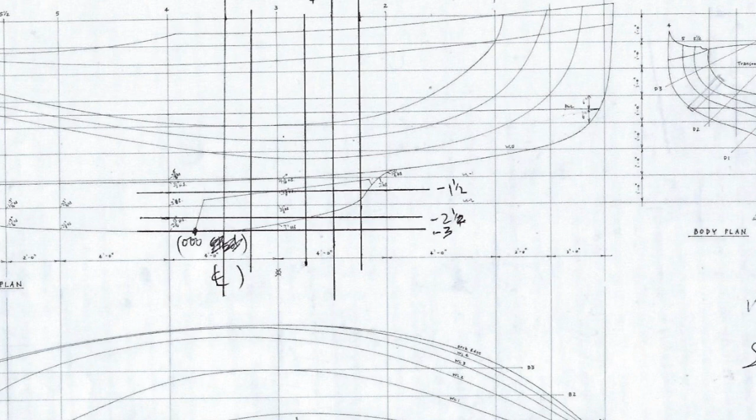My colleague Simon Sadubin and I measured up the original boat and lofted it out from our measurements back in about 2003. Then Simon drew up the lines plan from our lofting, but we didn't do a detailed lofting of the ballast keel at that time. Lofting is drawing the plans full size so that you can make patterns of parts of the boat, chiefly the station mould shapes around which you will bend the planking.

Back in 2003 it never occurred to me to film this lofting, so I won't be able to explain it using this boat as an example, but in my YouTube series on traditional clinker planking, the first 2 episodes are about lofting, which will give you the concept, even though the subject was a small dinghy.

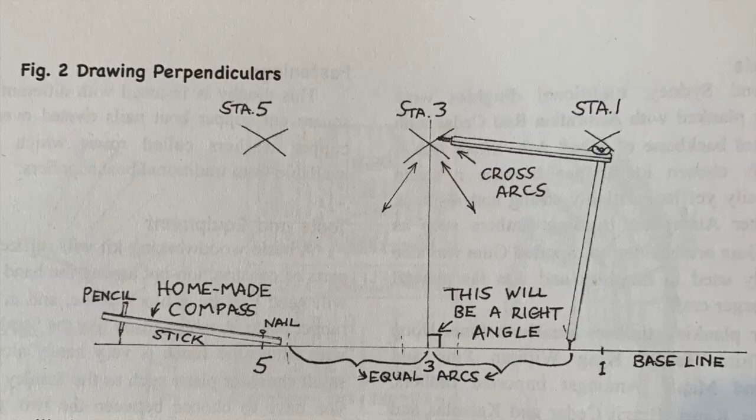Our original lofting didn't have enough detail of the ballast keel. What there was spread out over a couple of large sheets of chipboard, and with less room these days, it was easier to draw out a new grid and add the info from our tracings. It all fitted on one sheet. A lofting grid needs to be accurate. I laid out a straight baseline and all the parallel water lines, then drew in a vertical line that was exactly at right angles by this method.

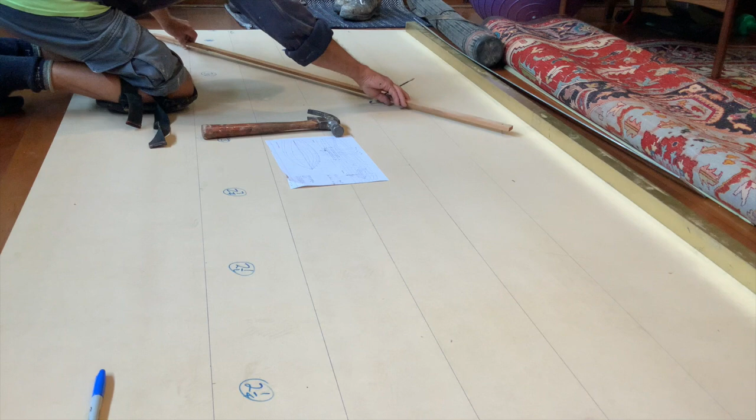Make equidistant marks out from your starting point with a basic compass. Then, extending the compass, mark 2 intersecting arcs from these points. A line from here to your starting point will be exactly 90 degrees to the baseline. The rest of the grid can be filled in by accurate measurement.

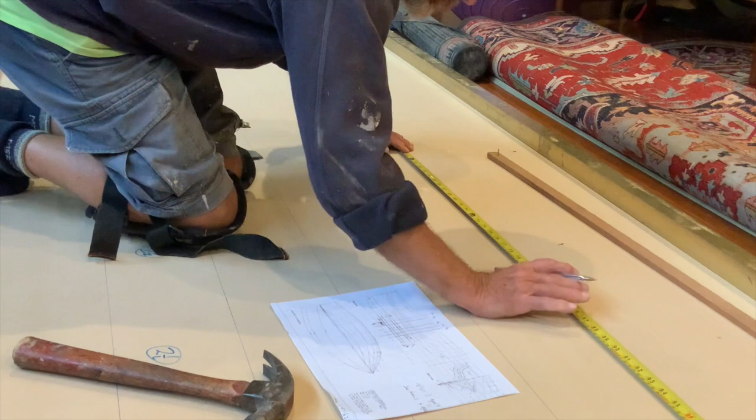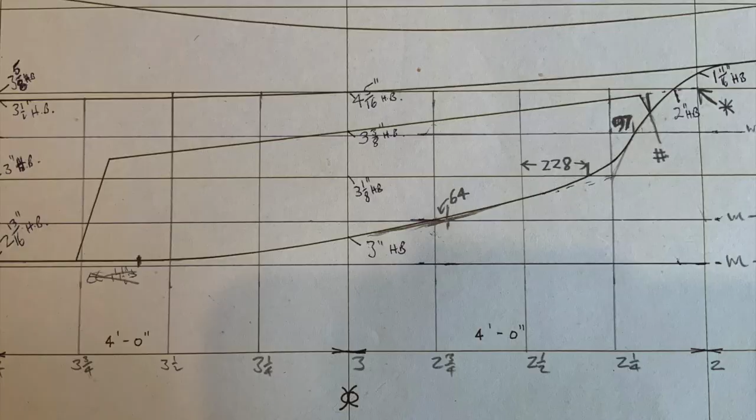Only station 3 goes through the ballast keel on the original lofting, so I added in more vertical stations, stations 2 1/4 to 3 3/4, and more horizontal waterlines for more detail. I got our original mylar tracings, and by pricking through with a nail, I transferred the details of the sections at the original station positions for stations 2, 3 and 4, spanning the area of the ballast keel, until I'd copied all of the details on our original lofting.

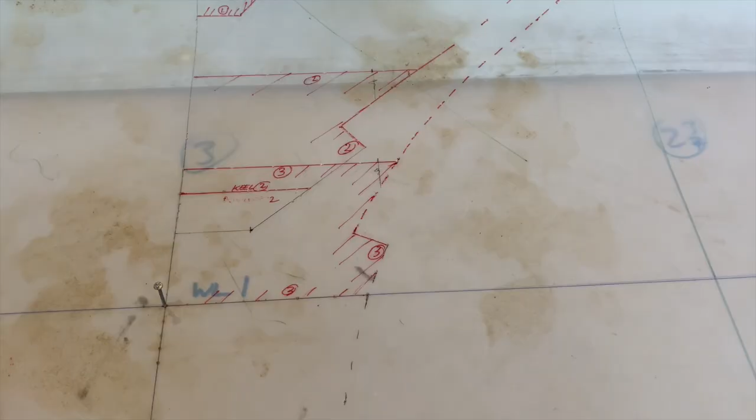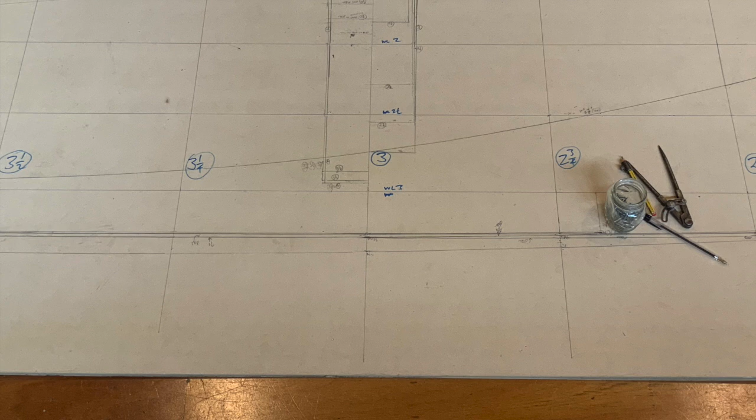So I had the shape of the wooden keel down through the deadwood and the lead keel to the bottom of the profile, and the width of the bottom of the profile all the way along. I plotted out the measurements from these sections to a longitudinal plan view on the baseline, and connected these points with a penciled line on a fair batten. This enabled me to pick up the measurements known as offsets at the new stations. Using these offsets, I plotted out the new intermediate stations.

Now, this is not meant to be a thorough how-to video, so don't worry if you can't get your head around it at this point. Even after lofting 3 or 4 boats, I still needed a textbook handy for the next one, and after that, even occasionally, I still needed to refer to one, especially if I hadn't lofted a boat for a while.

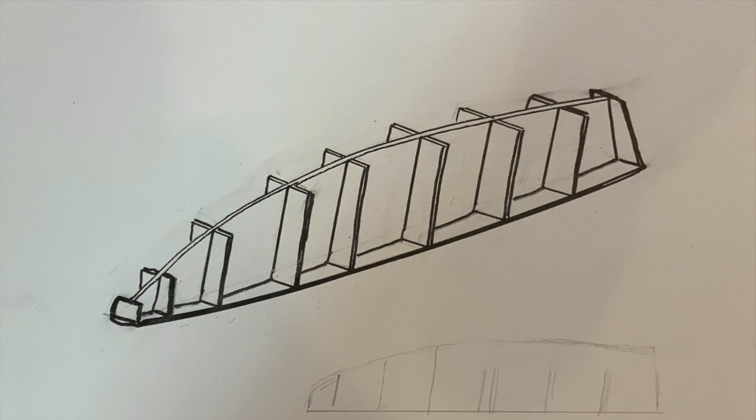Having drawn all the sections at the new stations, I transferred the shapes, with a deduction for the thickness of the cladding, onto plywood offcuts and set them up, upside down, on another piece of plywood representing the top of the keel, which was shaped by plotting out the half-breadths from a centre line spaced out along the slope of the top of the ballast keel, and therefore they needed to stand up at an angle.

The lower parts of the keel are straight in section, so I clad the stations in plywood, but used narrow strips of Western red cedar to strip plank the curved upper sections. This is like building a miniature boat. The bottom of the ballast keel was also done in plywood, and after fitting that, I rounded off the corners. Then I faired it all.

I used West System epoxy thickened with microspheres and used the bead bog method, which speeds up the process a little. When you sand off the top of the beads, you reach a fair surface quicker than if you'd covered the whole area. And then you fill in between the beads and sand again. Several coats of primer gave a smooth surface. Then the foundry applied their own silver paint.

I cast several keels in the late 1980s and early 1990s and had no accidents, but several near misses and a few minor problems. So for the 3 keels I've done since 2000, I've had them done at Central Foundry, who do a superb job. Mine was delivered recently, and now patiently waits in the cradle I made for it, which enables me to move it about. The original Ranger's ballast keel was 1180 kilos. This one came in at 1163. There'll be a little bit of internal ballast as well.